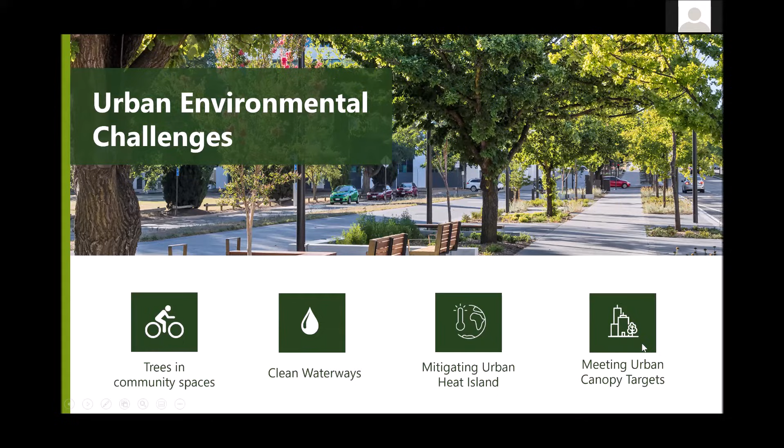Okay, so when we look at urban environmental challenges of a soil cell system, there's four main components that we're looking at. The first would be trees in community spaces. The second is clean waterways. The third being mitigating the urban heat island effect. And the fourth is meeting urban canopy targets. Now let's just drill into them a little bit before we really get into the guts of the presentation.

So this third slide here talks to trees in community spaces. We as human beings like walking around areas which have got nice tree canopy. Trees are very good for our health as well. And also in terms of shade, they provide a lot of shade and quality in some of our warmer cities across the US. Now, there are lots of issues with having trees in community spaces or in urban spaces. And the main issue being, how do we make the tree roots?

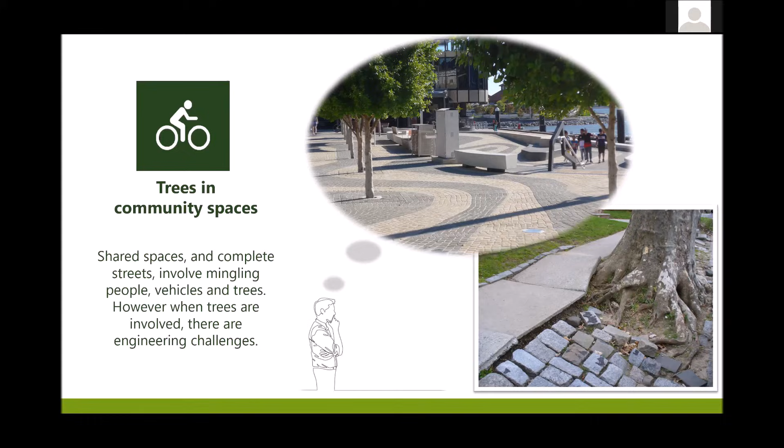What room do we allow for these tree roots so that these trees can become big, large, mature trees, providing all of that shade, aesthetics, and health benefits that we require of them? This has been a problem for the last 30 or 40 years. As you can see in the picture at the bottom of the slide here, this is what's typically happening. These trees are just trying to find whatever nutrients they can, whatever soil volume, whatever they can get at to enable them to grow and become these large mature trees. So that's the first area that we're going to be helping in.

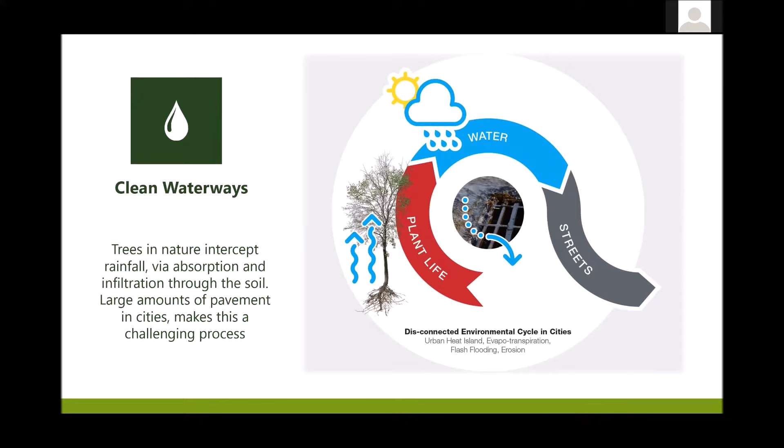Clean waterways. We've done so much in this space lately, and it's probably the most exciting area of our growth as a company. Too often now we're sending all of our polluted stormwater full of silts and sediments, oil, petroleum and metal pollutants into our city systems, and it's causing all sorts of problems, backing up. All of this pollution is running into rivers, streams, oceans in some cases. So we've come up with a solution for this, which again I'm going to talk to you about in a little while.

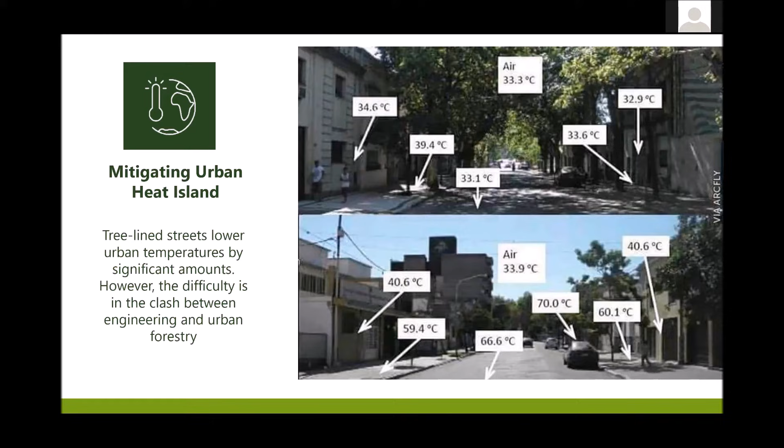And then most large cities across the US have an urban canopy target. This target is typically between 1 to 10% over the next 10 years. Again, regionally, depending where you are, that number is going to massively change. But again, we're helping cities with this. We're helping cities adapt this. We're helping cities grow these canopy targets to where they want to be.

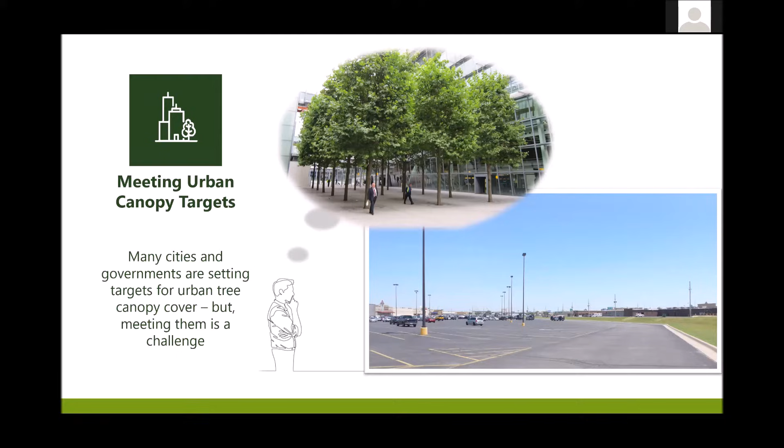Now, today we're going to discuss a little bit on soil vaults for healthy trees, tree root management and tree protection. It's going to be a very short portion of the whole presentation. And then we're going to get into the guts of it. It's all going to be about the stormwater and the way that we're running it through soil for trees, for storage, for collection. Lots of really interesting stuff in this presentation.

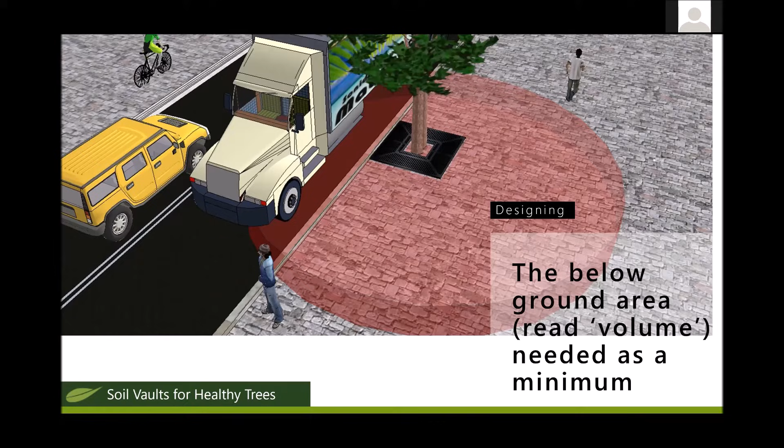So street trees in urban environments typically struggle. You walk down any main street in the USA and you will notice this time and time again. So that's, if you like, part one to the problem that we're solving here. We're getting these large street trees. And this helps us with the stormwater thing as well, which again, I'll go into in a second.

So this is our soil cell system, or soil vault system. This is called the Stratavault. And the reason this Stratavault exists is it's a structural module that goes underneath the sidewalk or underneath the road and supports that sidewalk. Now, while supporting the sidewalk, it also has a huge void space within the modules. And this void space has been, up until a few years ago, typically used for soil for tree roots.

Now, we're actually sending our stormwater, or our rainfall that falls onto the road, into these areas here. And the soil and the tree roots within the modules are actually helping clean the rainfall, or the stormwater as we call it. So that's the same thing, for anybody not that familiar with the concepts. Stormwater is basically rainfall. When I mention stormwater, that's what I'm talking about.

Now, on top of that, engineers have also been specifying our system to compartmentalize and organize pipes and utilities, underground infrastructure underneath these sidewalks. So this is a really big space as well for us. Typically, the engineer doesn't like to have tree roots around his pipes and utilities. Well, now we've come out with a way to organize and compartmentalize, so we actually remove that issue altogether, and we give the engineers the peace of mind that they need to use these systems.

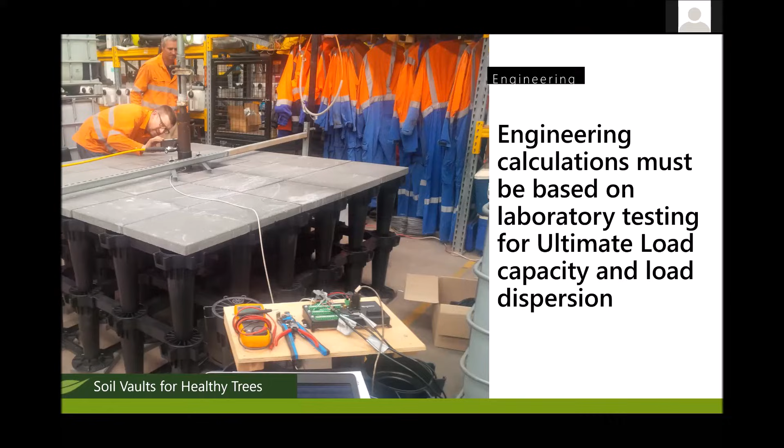When it comes to strength, we've got a very strong module here. We can go underneath roads, parking lots, parking areas, whatever that may be, and we actually apply the load in kilonewtons, and then those results come out on a per square inch basis. We have a connected module, which means that we share that load across all of the modules there. That helps us again with the strength.

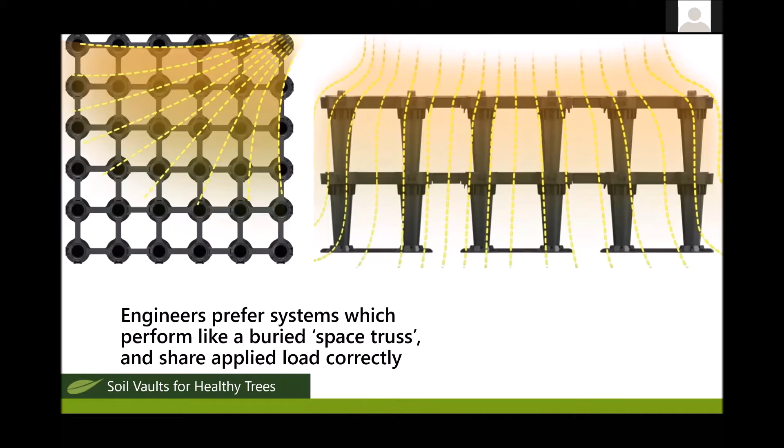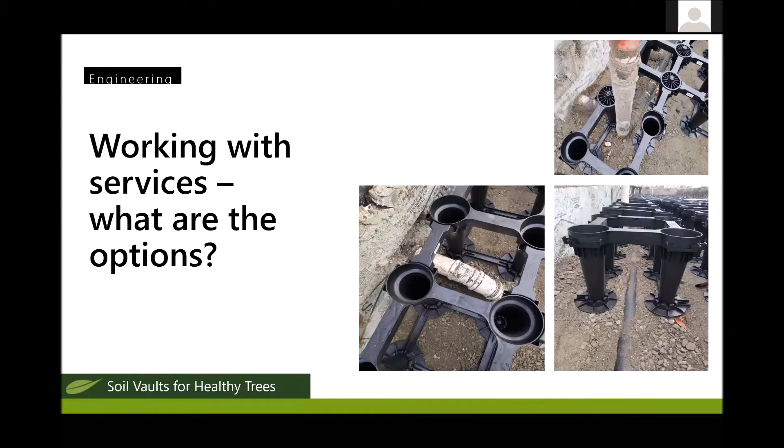And we manufacture our product out of 100% recycled plastic, which we believe is very important, and we're very proud of this. I would say that we get specified for this reason the most of any. And then working with services and utilities, this is a really important part of it as well. There isn't basically a city in North America that we can't work with, where we can't utilize our system and get all of the cubic footage of soil that is required for these trees and for this stormwater. So yeah, just a bit of a heads up on this.

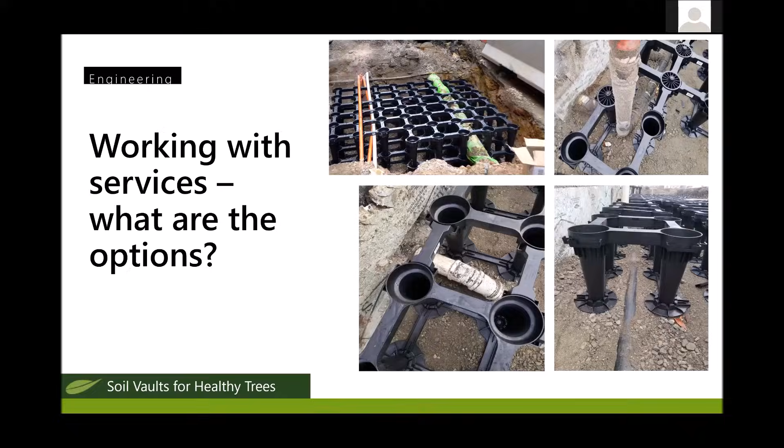If you ever get any feedback saying, hey, we've got too many pipes, too much utilities down here, too much underground infrastructure, no problem. Our system is the most flexible in the world. We can actually cut our system as well without compromising any of its strength. So these are all really positive things. And in terms of diameter for the openings for pipes and utilities, again, no problem. Our module's been configured so that all pipes that go in the ground at these heights will fit through our system very easily.

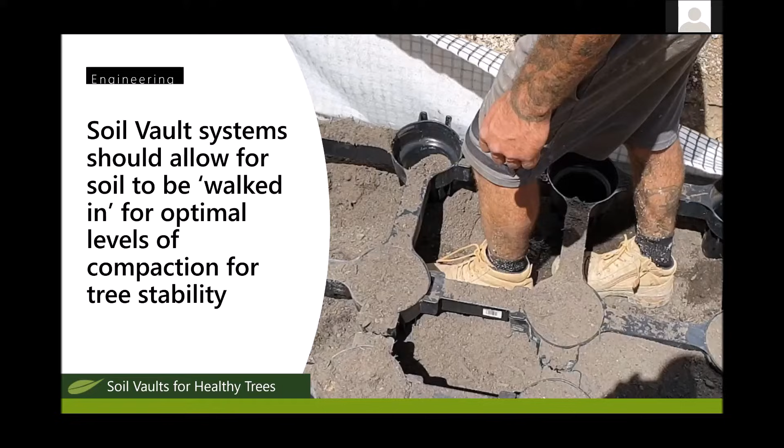Also, foot compaction, no issue here either. We do recommend that when we're putting the soil into these systems that we walk through the soil to compact it to a nice level. This is good for tree growth. When it comes to stormwater, it's a little different, and I'll get into that in a second. And the system that we manufacture here is so strong that we can actually have vehicles run across the top of the product. Now we do have to have some sort of plywood sheathing or a granular material on top of the modules, but again, very doable.

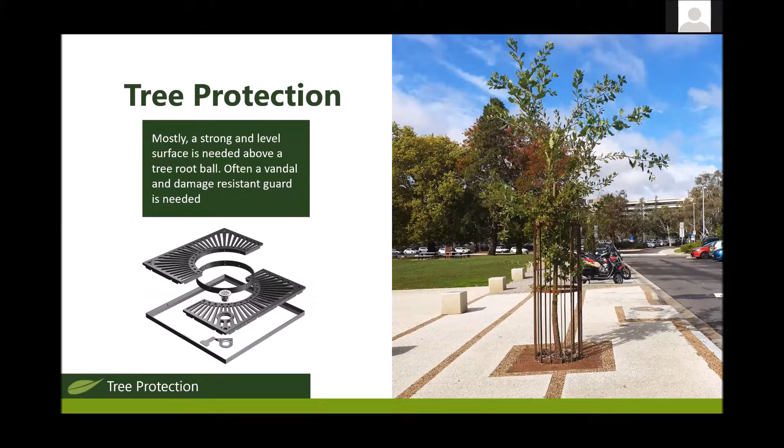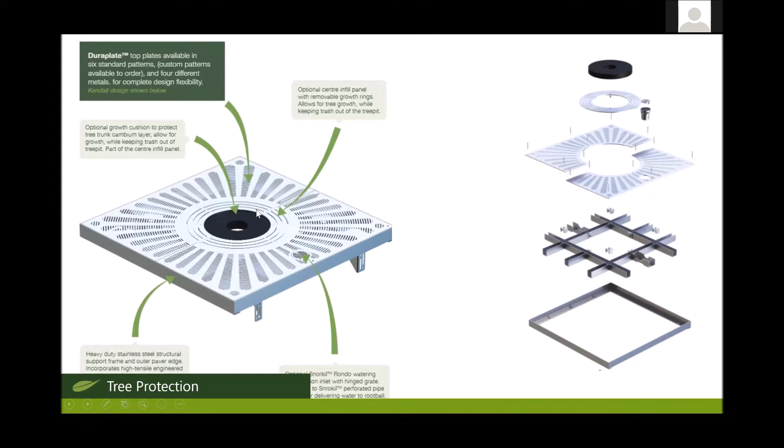And we do also have a tree protection line. So this is a really interesting space. We've been selling tree grates for a long time, but we've actually come up with a stainless steel version, and we can actually cut away the metal inserts as the trunk gets bigger and bigger. We also have an Invisigrate here, which is an invisible tree grate in case we've got a really nice paving product that we want to make front and center. We can put that paving product into the tree grate and go from there. And again, these are all products that distributors like Bowman carry.

Going a little bit robotic, so I'm curious if we're having a bit of a connection issue. Oh, really? I might need to switch this over to our computer if that continues. Okay. All right. We'll see. I'll maybe slow down a bit and see if it fixes itself. Can you just let me know, Bill, if you don't mind? Absolutely. Chantal said that you sound fine. So just keep on trucking, buddy. Thanks. Awesome.

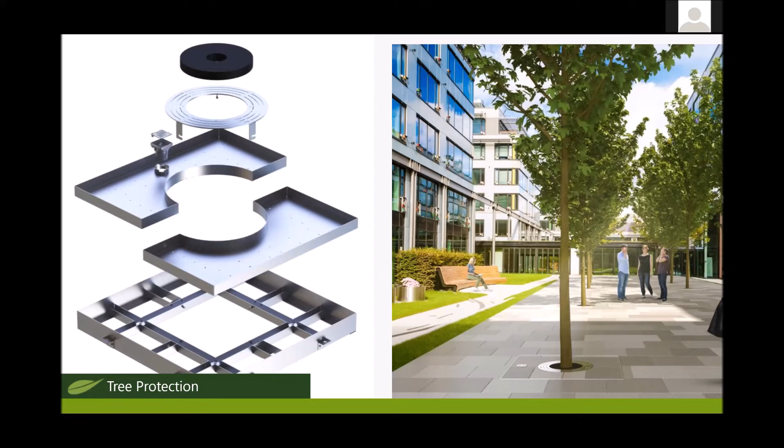Okay, so let's get into the meat and potatoes of the presentation today, guys. This is, like I say, a really exciting space. Our Strataflow system is fairly unique in the industry because we are actually using it as a stormwater tank that goes underneath sidewalks, sometimes even in fields, underneath roads. And we have the ability to store a lot of the rainfall that comes down, keep that water under the ground for X amount of time, and then pull that water out via vacuum or via valve to seep into landscaping for plants, for trees, for really any means that we see necessary. So this is an interesting space.

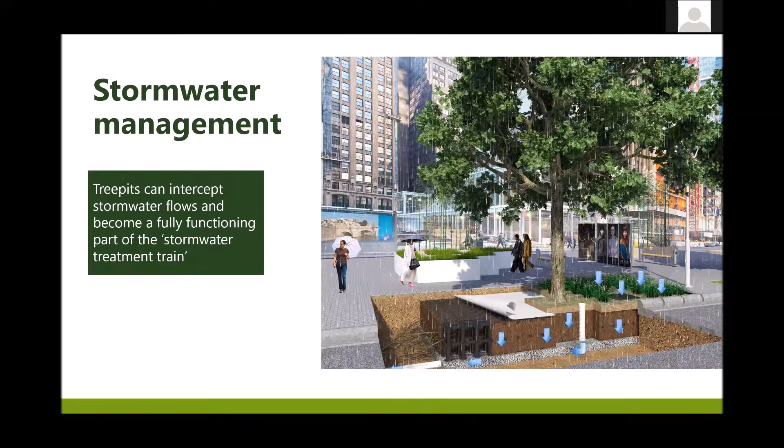It does get a little bit more interesting than this when we get into the stormwater management piece and we're incorporating these with soil. So first of all, let's look at a residential application before we get into the commercial stuff. The residential application for these soil cells is huge. We're actually using these soil cells in a lot of older neighborhoods across Canada and the US, in areas where there's flooding and other problems.

We can put these soil cells into the ground, put a mass of soil beneath any hardscaped areas, and capture a lot of this rainfall in these areas, while also feeding the trees. And it's a two-way system, which again I'll go into in a second.

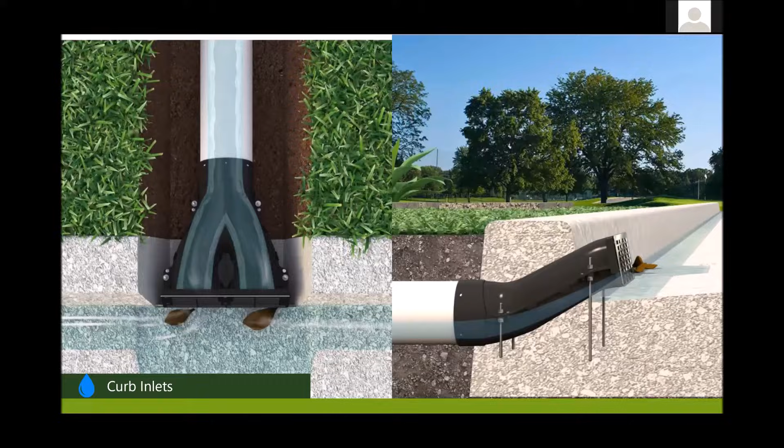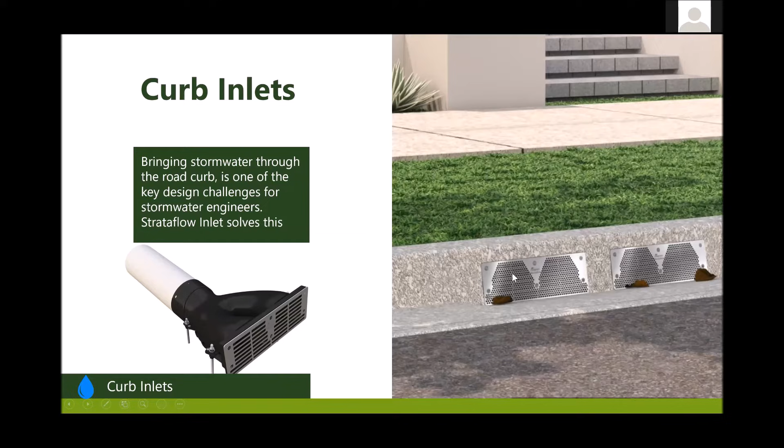So these curb inlets, we were waiting for somebody to invent this for a few years, and then we decided, hey, let's do this ourselves. So this is a really fantastic curb inlet product that sits in the curb. Again, it collects all of that water, and then that water drains through into the area of soil cells, the large volume of soil where the trees are, or potentially where the storage tank is. Really, we've got endless opportunities in that space.

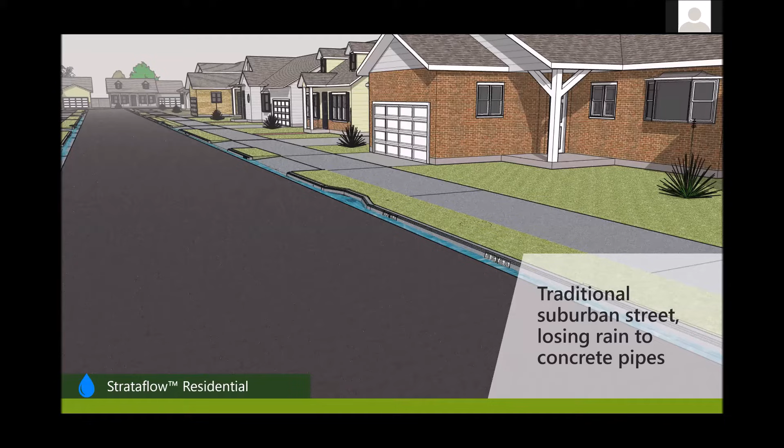So let's take a residential neighborhood now, for example, and we'll dig into this a little bit. So this is an older neighborhood. This neighborhood unfortunately does flood. And what we're doing right now is just sending all of the rainfall down the gutters into the regular catch basin. Now this catch basin can only take so much water. So once this fills up, if it backs up, of course this road is flooding. These houses typically might be flooding. There's lots of issues around this space.

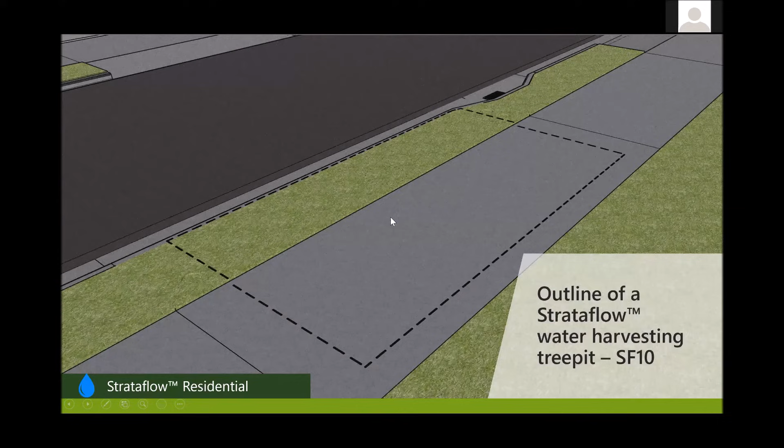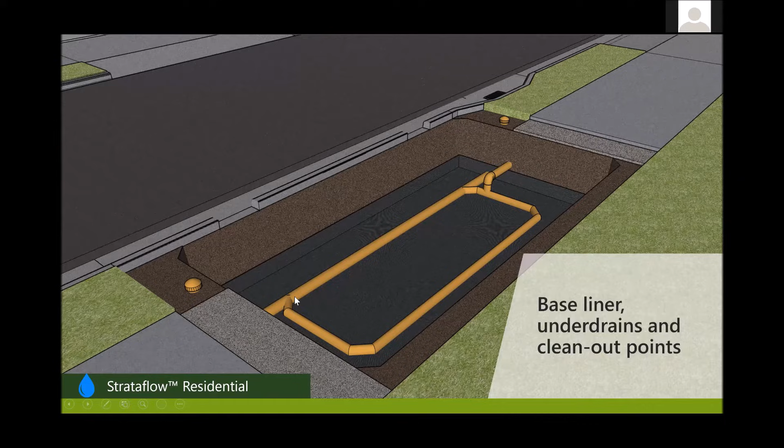So what we're saying is, why not add our curb inlets into the curb here in these two spots, and then we build what we call a Strataflow pit in this residential area, and we fill it with some materials. First of all, on the bottom is a pipe. This is an overflow pipe in case the stormwater builds up to a certain level. This pipe is then used to get rid of that water into the city system. Now, this water will at this point be clean water, which again I'll go into in a second.

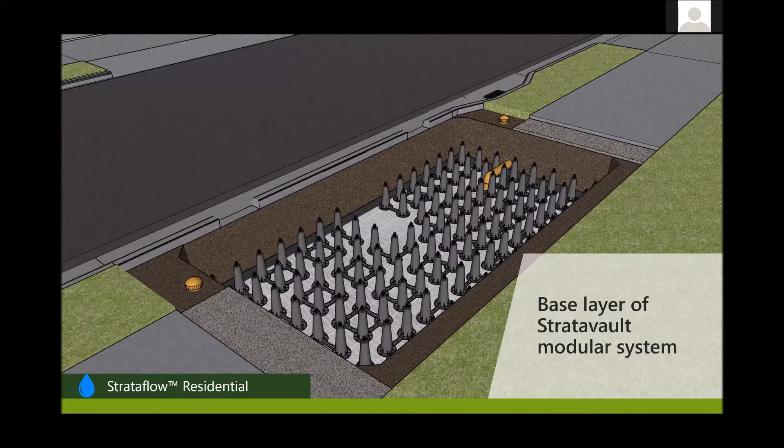Now, once we put the pipe in there, the drainage, we then add a drainage layer above that pipe, and then we start putting the Stratavault modules in place. So the Stratavault modules go in like this. We then add a full layer of soil for the trees. Okay, and then we add more Stratavault modules, and then we actually add one or two layers of filtration media. This filtration media is more of a sandy mix, and this enables the stormwater to run through it very quickly, which is what we're after.

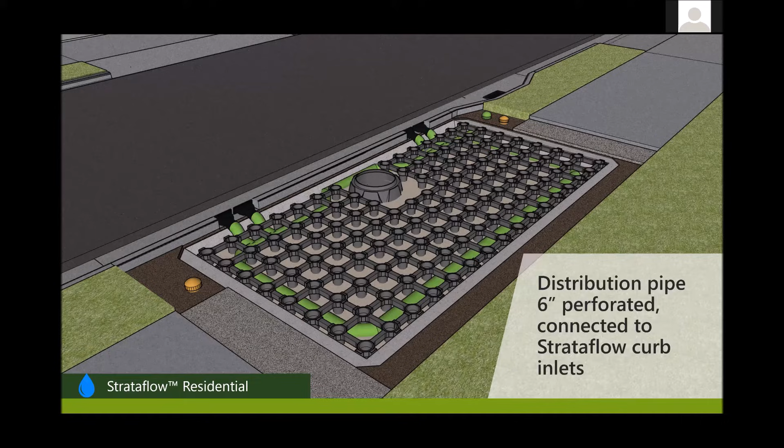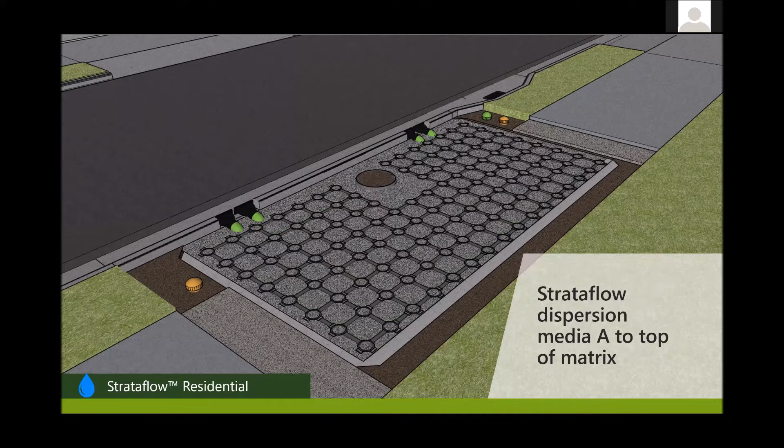And then again, the inlets are connected to a pipe matrix, a perforated pipe matrix, which is going to release that water into the filtration media. And the water is going to drain into the soil at the bottom, which is going to feed the trees. Now in this case, we've got a third type of media in here, which can be used, doesn't need to be, but certainly that's how we've designed it. And then the top of the Stratavault goes on there. Now we then plant the tree.

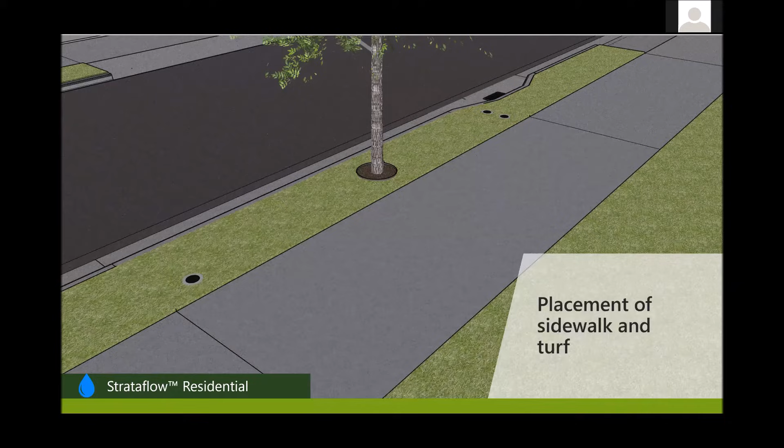The beauty of this is that the tree roots and the soil, well, the tree roots in particular, will take up all of the pollution that's coming from the road. So all of these oil, metal, and petroleum pollutants, the tree's roots will actually take up a lot of these pollutants and use them for its growth and get rid of what it doesn't want out of its leaves. So it's really a fantastic way of cleaning the stormwater in a very natural way, and actually very inexpensive.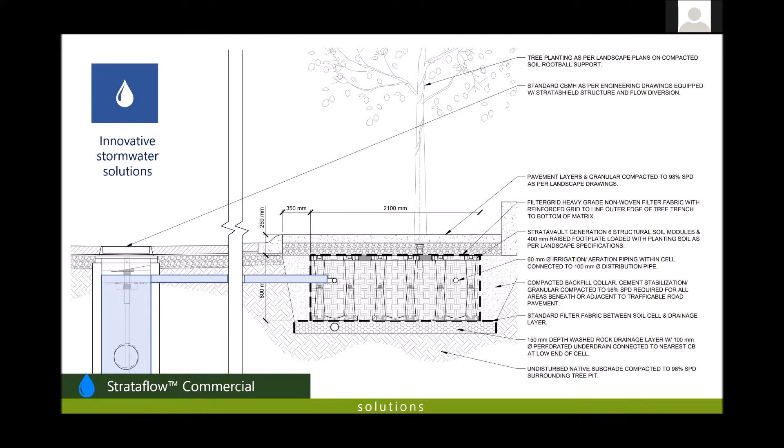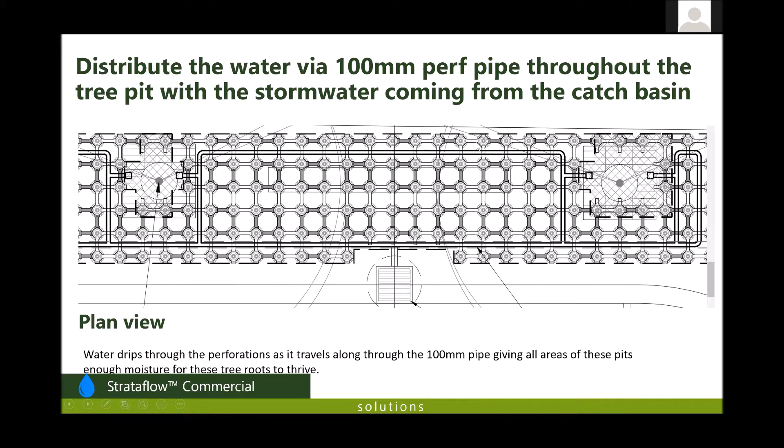Now again, this is the area where the stormwater is cleaned, and this is a plan view of the sidewalk. This is everything that's happening underneath the sidewalk where this stormwater is going into. This pipe system is just a perforated pipe system. This is allowing the water to drain into the soil. Now let's have a look at a few applications of this product, and then we'll look at some other really cool designs that we've been doing.

This is the streetscape, and again, the rainfall is landing on the road, and then the rainfall runs into the gutters that run down the sides of the road into the grates. And these grates here then have a pipe which sends the water into the soil cell area on your left. And this is the material that the tree is going to really suck up all of this stormwater and really help it grow.

Now, Bill, what do you want to do as far as questions? I see there is a question in the Q&A. Do you want to handle these as the presentation's going on, or what would you prefer? That's fine. Normally I don't want the speakers distracted from chat or Q&A, but you're a pro, so you can handle it. And Ivo's a friend from Snyder and Associates, and he's familiar with a lot of vegetated solutions. And he raises a good point that you've talked to me about. So if you want to answer his question while you're rolling and still keep us in 1 hour, then go for it, buddy. Okay, very good.

Small openings of inlet grates reduce flow capture. I think he's talking in particular about your curb device that you've developed yourself to let water come in through the curb, and he's concerned about that getting plugged. Okay, yes, very good. So we do have a solution for that. Thank you, Ivo. Maybe, Ivo, if you wouldn't mind just sending your email. And I have that. I'll share that with you too. Awesome. We're going to send you some information on the actual pre-treatment device that catches all of the silts and sediments and stops any block-ups from happening, because that is definitely a problem. And we had to manufacture our own product to overcome that. So we can get all that information to you, Ivo.

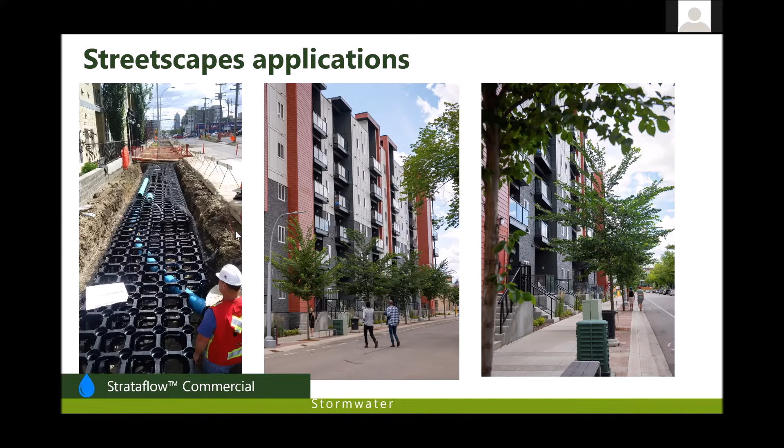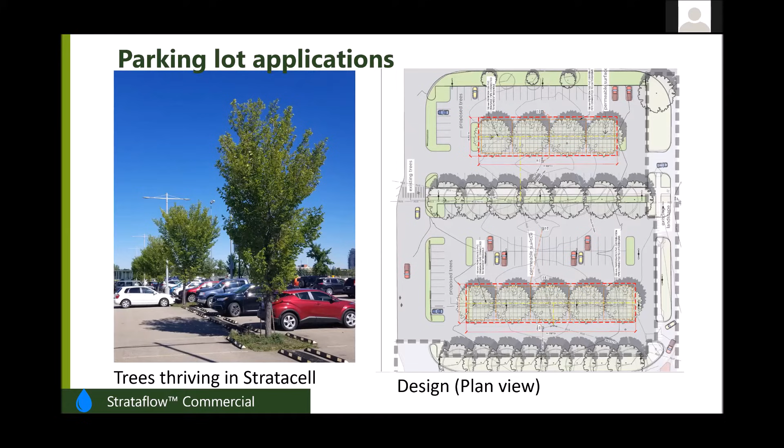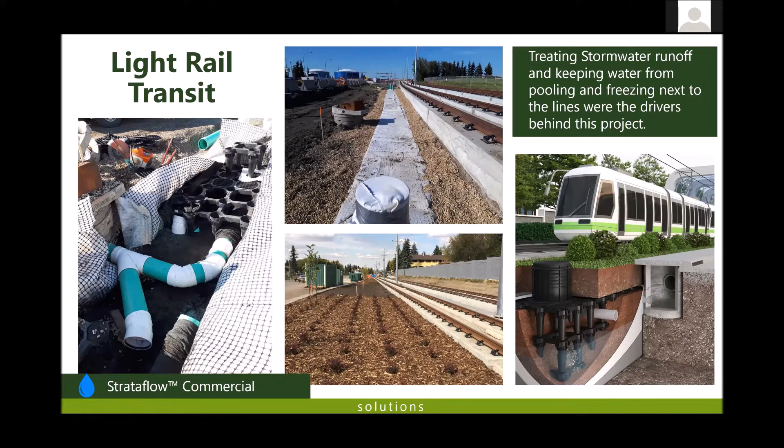Now, this is a really cool project that we've just been a part of. This is a stormwater project again, and everything north of this light rail transit station was a parking lot, buildings, lots of hard surface. So the engineer put in a trench drain at the top of this site, which takes a lot of the water from the site to the north of it. And then the water drains from the trench drains into these perforated pipes.

For example, if we just got a crazy amount of rain, then of course we have an area here where the water will go back into the city system, but at least it's been run through the soil cells first and cleaned. So a really fantastic way of using these products.

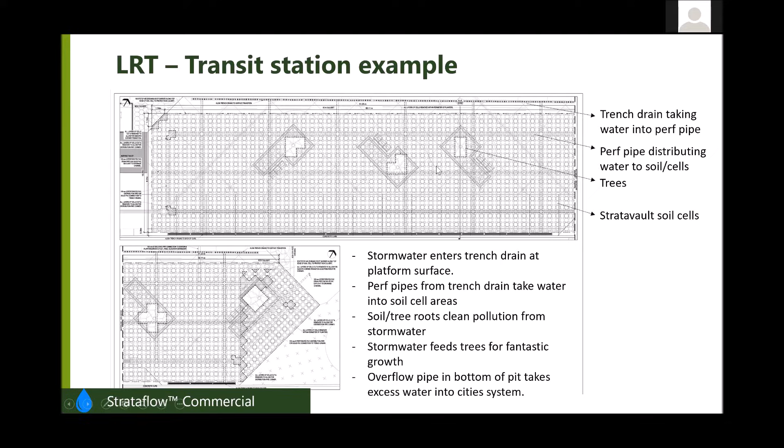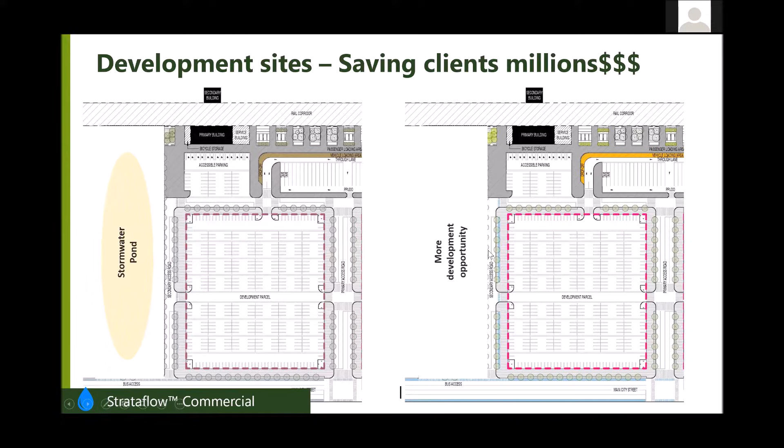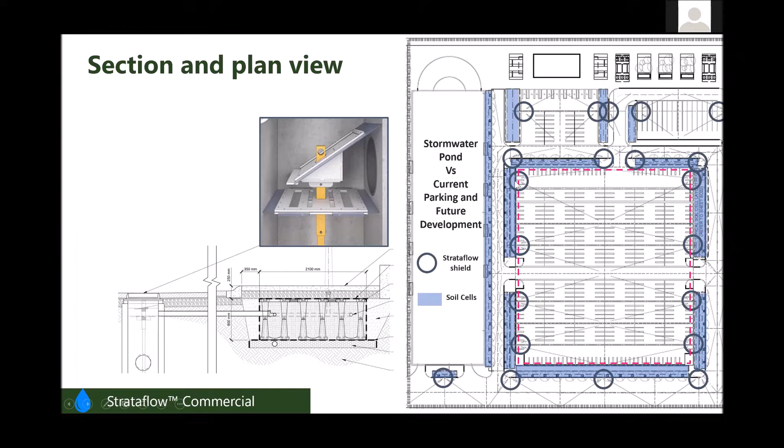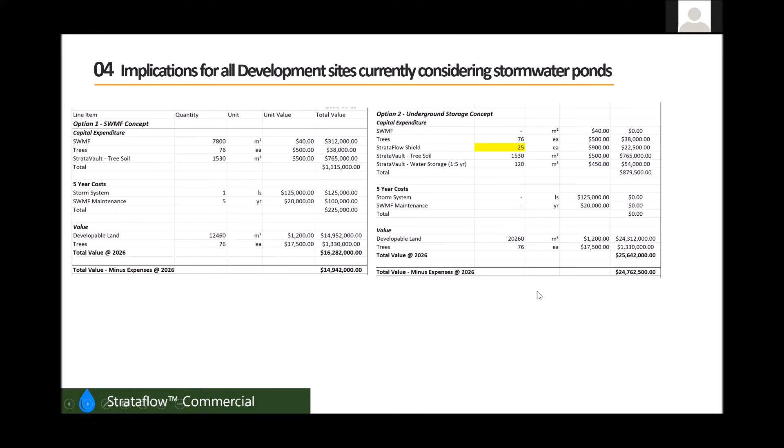This is really going to become a huge way of doing business in the future, and really using a lot of these soil cell products to collect all of this rainfall, this stormwater in these large rain events, and use the land. I mean, we could put a park in there, we could put more buildings, we could put a bike lane. There's lots of things that we can now use that for.

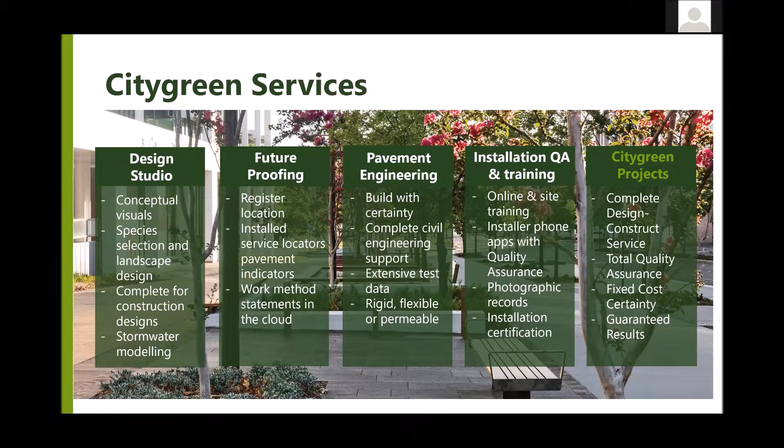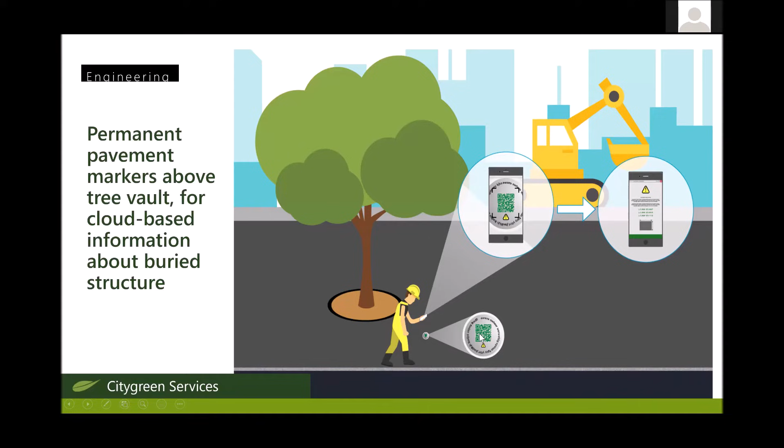And then we also do some monitoring as well. So when we're putting these soil cells in and the municipality wants to go in there and make changes, they want to dig, but they're not sure what these big plastic modules are below the ground, we can help with the monitoring of these soil cell applications. So they can literally click on this QR code and they can find out exactly what is below that surface.

Now, our system is also unique, or our company's unique, because we do use an app for all of our installations. So that contractor, once they get signed up for the app, they can go on there, they can upload live photos, live videos straight to us. Hey, Citygreen, what do you think of this? Is this right? Would you do this a little differently?

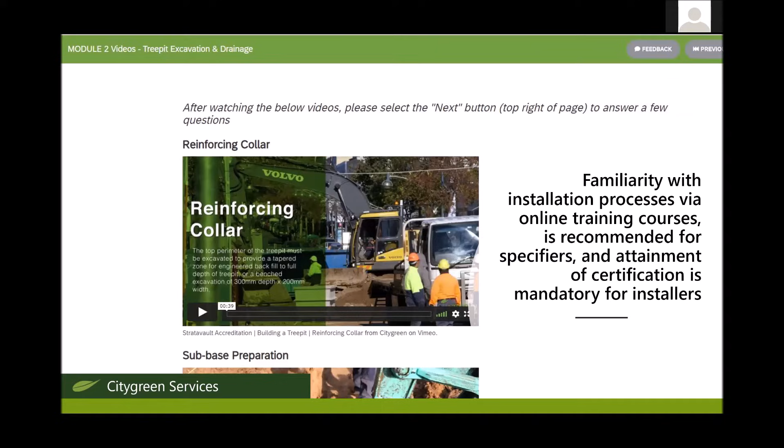You know, municipalities can be involved in this as well. Designers can be involved in this. So we can't be on site all of the time. Certainly with the distribution, it certainly helps. But this is really a fantastic way of being on site all the time and being able to answer any questions from that contractor when he has them.

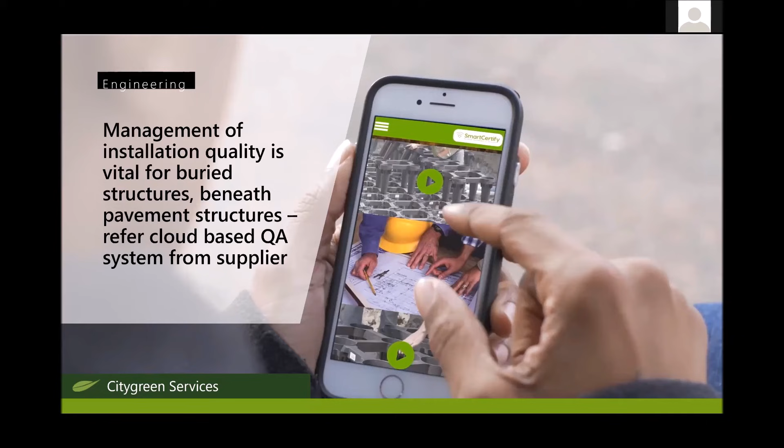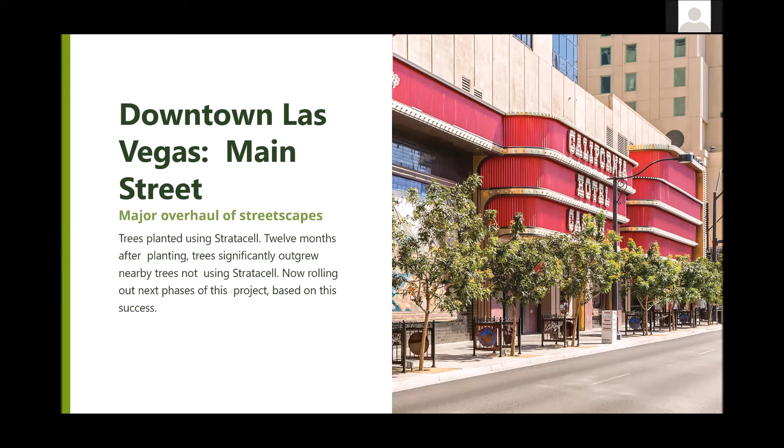So just a couple of projects that we've worked on already this year. Las Vegas, we do lots and lots of projects here. We just finished a very nice streetscape in Vegas. Again, they need our product for water storage as well as for tree growth. Disney, we do tons and tons of work over the years with both Florida and California. This is a project that we recently did with them. Again, we just finished this one, and this is fantastic.

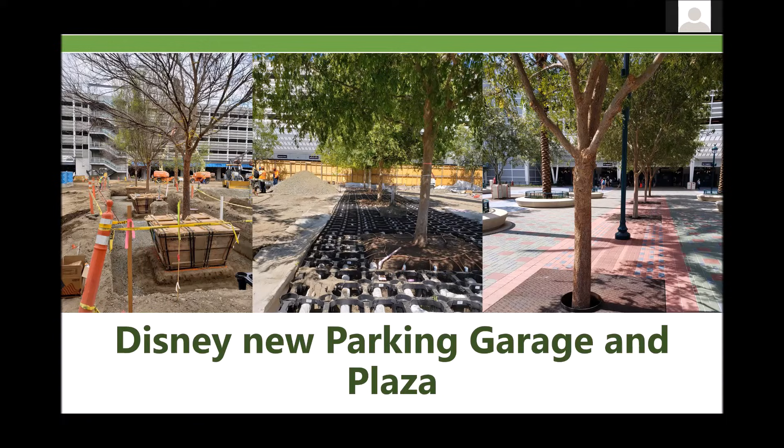If you look at how Disney bring their trees in as huge full trees with these massive root ball systems, and then we work around their root ball systems with our product. And we don't have the advantages, unfortunately, of doing this. They tend to store their trees for a few years before they bring them into their projects. Wouldn't this be nice? You know, we do some cold climates too. Winnipeg is the coldest place I've ever been. It would be colder than anything you have in the US. You know, you have some places with similar climates.

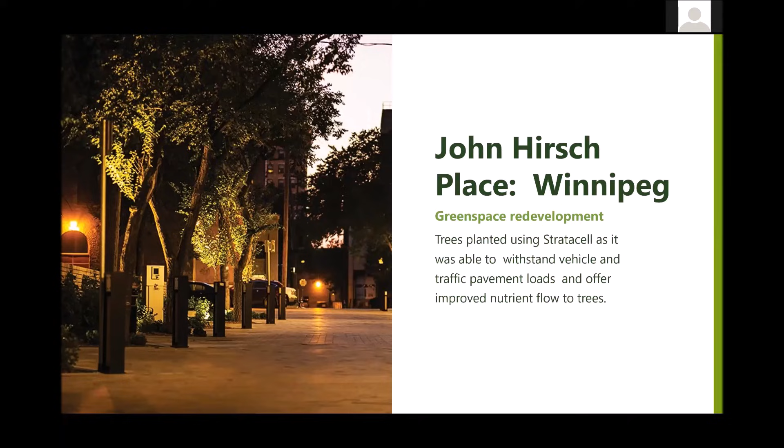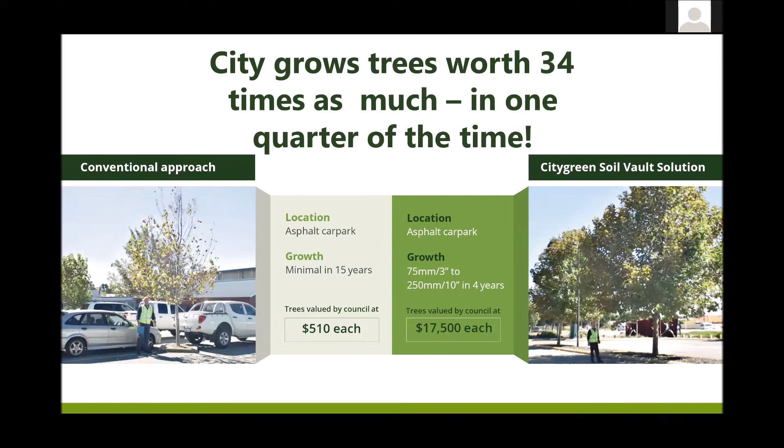And then this is a really cool slide for any municipalities that might be on the call here. This is the value of the trees after 4 years worth of growth. When it was planted, it was worth $500. Now it's worth $17,500. So the difference is huge over a 4-year period. Now, if a developer wants to come along and pull these trees out, the city can either say, yes, you can, you owe us $17,500 per tree, or the alternative is we'll keep going the way we're doing it, and we've got these scraggly looking little trees that, this one's actually been around for 15 years, but it's never provided any of the shade, aesthetics or health benefits that we require of these trees.

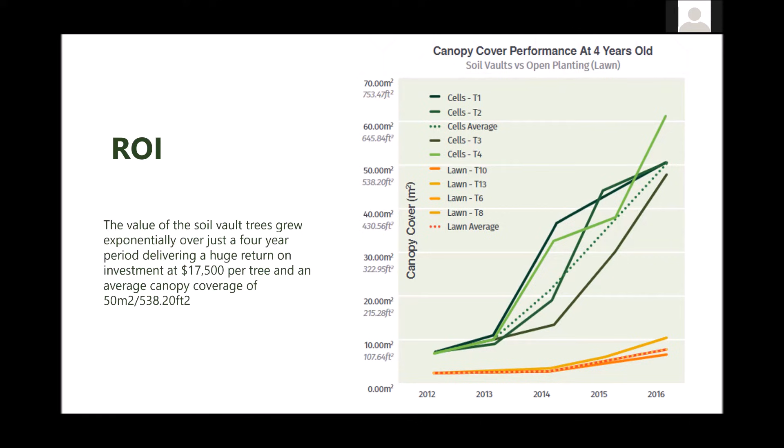Some really cool outcomes, fantastic tree growth in our soil cell areas compared to even some of the greener areas. Again, return on investment, we can help you guys if you've got any questions around costs. Soil cells are not an expensive product at all. Typically to have them installed gets up there, and certainly it's more expensive than just planting a tree into a 4 foot by 4 foot square. But when you look at the ROI involved, it really is a no-brainer, especially when you include the stormwater portion into it. We're actually saving lots and lots of money by providing the stormwater application in this.

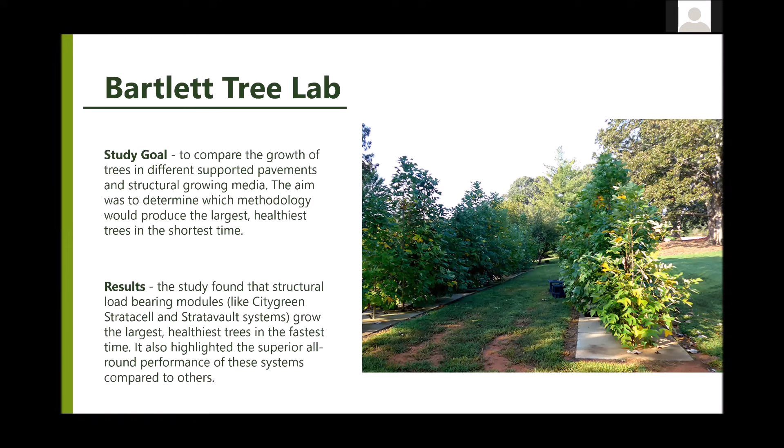We've done various laboratory reports on the soil cells and how they work with trees. We haven't done too many with stormwater yet, but we'd love to. And some of our partners across the US include all the people on here as well. So that concludes my presentation.

Can we maybe open the floor now to questions, Bill? Is there any questions from anyone? Also, I should mention this as well. Yeah, we can. Sorry, Bill, just mention quickly as well.

Pilot projects. We've got some really interesting projects that we're working on across the US with various cities, towns, municipalities in general. And we're looking for anyone who's really trying to get over this line and get this kind of technology implemented. Let's try and set up a pilot project in your town or city with maybe a main street or something similar. We can, in some cases, help with the cost of the soil cells, but more important than that, we'll help with all of the monitoring information. We'll help with pictures, videos. We'll do some interviews with the people involved, and we'll get your municipality over that soil volume line, over that stormwater line, and we'll get some really cool and fantastic streetscapes happening across the US.

Steve, can you hear my audio okay? I can, my friend. Yeah. Excellent. So hang on, let's see if I can turn this off here.

One of the things that I was going to mention, and I see a Q&A popping up here, is that Brian Williams asked us to describe the maintenance element related to these types of storage solutions. And this connects to a meeting we had yesterday where we talked about pre-treatment. We're putting water into the soil that goes into these cells. We're not putting debris and sediment. So pre-treatment's a huge part of the treatment train.

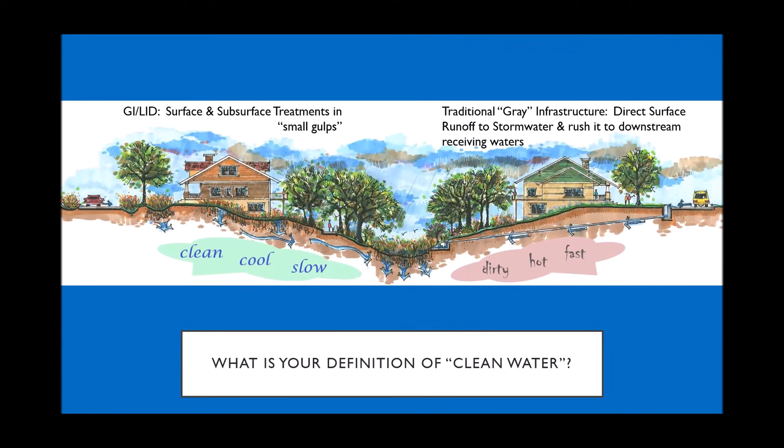And in fact, the same thing's happening with our traditional stormwater. If we don't do these things, then water's going to find a way, nature's going to find a way. That's going to be flooding. That's going to be more erosion. That's going to be more other bad things. But the answer to Evo's question is the upper right corner.

The cost of a city to clean their inlets and to clean their filters, whether it be bioretention, rain gardens, storm sacks, filters, inlet filters, curb inlet filters, any of those things, is much less than the cost of going to try to retrieve that trash from our large bodies of water. And it's much less than the cost of the kids and the people who are counting on us to provide clean water.

So go ahead and keep asking that question of whether or not the cities are going to maintain these, and do ask the question of whether or not there's going to be a cost associated with it. The answer is always going to be yes. There's going to be some cost associated with whoever's responsible for observing these systems and maintaining them and cleaning them. But there's also a terrible cost of the do nothing alternative.

Trees have been doing this since the beginning of time. Trees are the best at it in the world. I do mission work across the country and sometimes in Central America. And I can tell you, after hurricane or tornado or flood, about the only thing remaining that survives are healthy trees. Everything else is destroyed. Everything else is temporary. Healthy trees are our best effort at not only cleaning the water and the soil, but also the air.

So with that, I'll go to other quick Q&A if we have time. I get off my little soapbox. It is 12:23. We have time for more Q&A.

So Evo, keep asking that question and keep expecting your community to do better, and they'll start to finance that. I'm running into that a lot. In fact, sometimes, Evo, our friends are finding that one department in a city, county, or state wants trees, or they want curb inlet filters, or they want some better stormwater quality for green infrastructure, but it doesn't necessarily pass on to the people who are actually required to do the maintenance. That's where we're right at the tip of the spear. This is the hard part of what we all do for a living. We can propose beautiful landscapes, but somebody has to be responsible to maintain them.